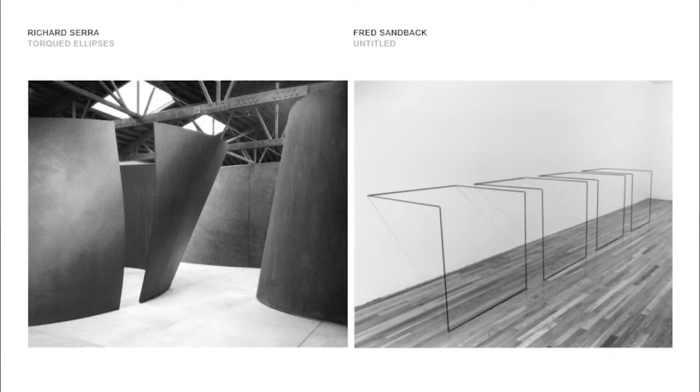A few years before starting the competition for the cathedral, I happened to be in New York at the Dia Foundation on 22nd Street and saw the first installation of Richard Serra's torqued ellipse. These massive pieces of Corten steel are shaped to form spatial conditions. To experience one in person is a profound experience.

At the same time, across the street at the Dia Foundation, was an exhibition of Fred Sandback, who also makes space but with the most minimal, ephemeral means—small cords, actually pieces of wire, stretched between rooms to transform space. That contrast of weight, lightness, and space was really profound, and something to think about when considering a cathedral.

As a young architect, travel is extremely important. Take every advantage you can of the opportunity to travel.

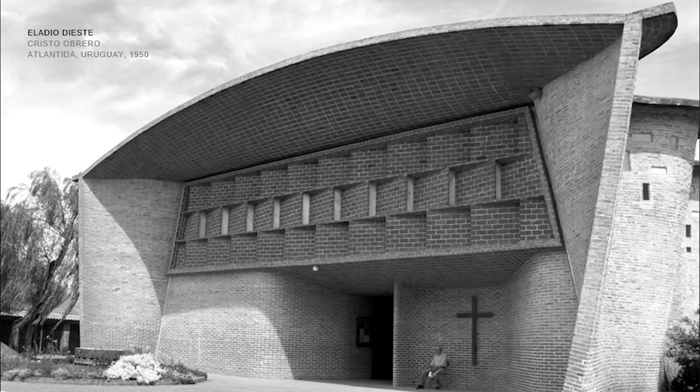A few years ago, Anna DeBrea, a professor here at school, asked me to go to Buenos Aires to teach, and we took the opportunity to go to Uruguay to see the work of Eladio Dieste, who worked with farmers and construction workers to make these incredible spaces.

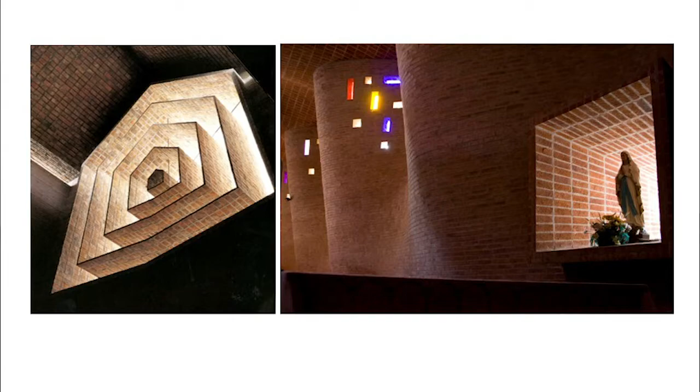This is a church made entirely of brick, where the curved forms you see create structural strength and resist lateral forces. Again, light really ennobles this most modest of materials—brick—to make this beautiful space.

So light is really a transformative material to work with. This is the Air Force Academy chapel in Colorado Springs, designed by the architect whom I first went to work for at SOM, who was a partner in their Chicago office.

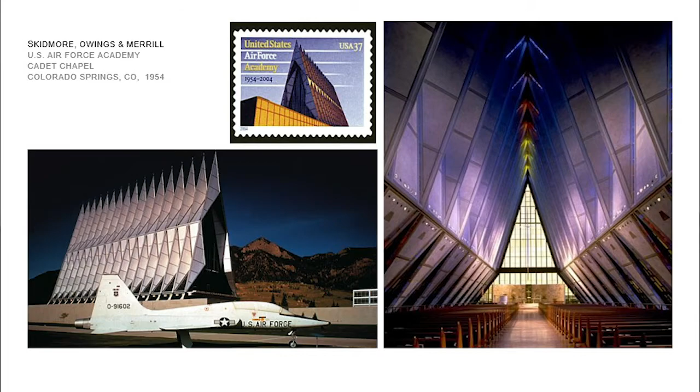He taught here for a couple of seminars over time, and through that I was invited to join them, which I found to be an extraordinary experience. In my entire career now, I plan to be there for 2 years.

But this is the interior of it. You can again see how light and the use of small amounts of stained glass transform aluminum.

So you are in a moment in planetary history in which we as human beings are shaping what the planet is and its very viability for human life. So as architects, planners, city planners, you have enormous power to affect the natural environment.

Almost two-thirds of the carbon dioxide that's emitted comes from our buildings that we produce, how we move between them, and how we operate them.

So as architects, designers, and planners, you have enormous opportunity and really responsibility to think about how we can deal with the fact that we have fewer natural resources on Earth, less biomass support than we have, and more people than we have to be supported by that.

So for sure, we've seen even in the last decade that there are ideas in city planning, in architectural design, in transportation, in technology to radically reduce our consumption.

Reduction of consumption at all levels is important, and that even means being careful about what you build. Always try to be efficient in the way you use material, the way you run your life, in conserving water, energy, and consumption in general.

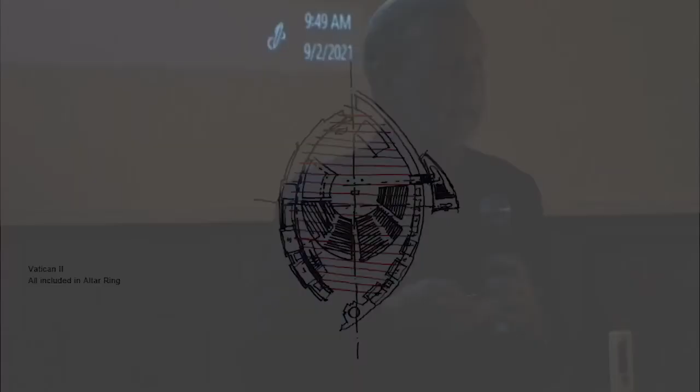And about form that might be soft in this case, that might be fluid, and especially respond to the commodity part of Vitruvius's triad, which is the function of the Catholic Church.

I'm not Catholic myself, so I relied upon research with Catholic scholars to make sure what I was proposing wasn't crazy, and found that in 1962 there was a reformation of the overall orthodoxy of the Church, including how churches and cathedrals should be organized.

As opposed to a linear basilica form cathedral—the great cathedrals of Europe, if you've seen them, the Roman cathedrals are all long and thin—that's based on an early Roman basilica form, which was a kind of marketplace.

The idea about that linearity was that the priest, or bishop, was at the front, so your relationship was you, the bishop, and the bishop to God. That was kind of the hierarchy.

So the Reformation idea was to create a community of people about the altar, so you were as one, as a community.

So this presented some interesting possibilities and also some real challenges, because the great basilica form cathedrals, the ones we really know and admire, have iconic shapes.

This sort of fluid, bulbous form instantly was a question to me about how do we resolve this to achieve the third point, which is beauty and delight.

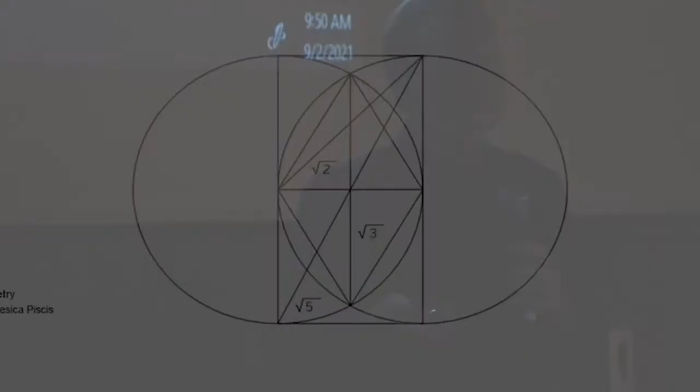So that was a study, knowing that all of our work should be informed by geometry. The early cathedrals, of course, are geometry—if you look at the plans, they are really rigorous geometries in plan, and even taken to the third level in three dimensions.

So for this particular plan, I noticed that if we took two circles and made them intersect, we could create that shape you just saw in sketch form, with the two intersecting pieces of that circle beginning to form that shape.

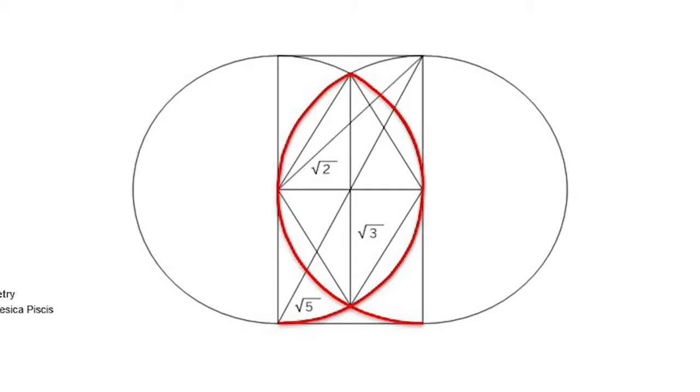It didn't take long to go beyond that to see the reference to the fish, from the early Christian symbol of drawing a stick in the sand—one believer would make a circle this way, and the person they met on the beach, because this was a dangerous time to be a Christian, would make a circle the other way to form the Pisces symbol, signifying a common belief.

So anyway, it's sort of coincidental or interesting that this form has now been observed by the Hubble telescope and other distant galaxy observation techniques, seeing star nebulae that form the same kind of shape in the universe. That's maybe coincidental, but interesting.

So in architecture, the way we start is always with pencil sketches, or now with digital sketches, and with 3-dimensional models, beginning a rough study of how we get to form. Once you've done that, you want to begin to find ways to create rigor and clarity around that form.

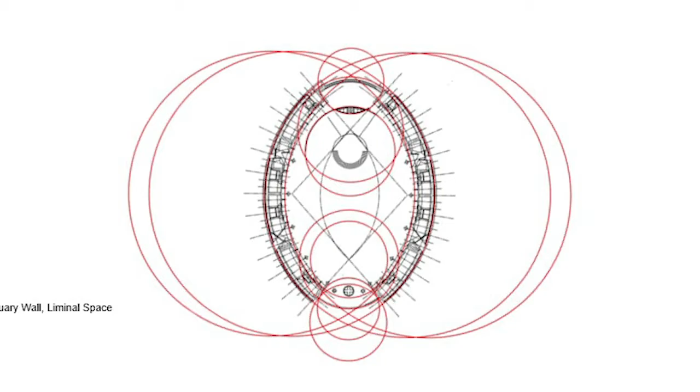So after developing the intersecting circle idea, we took the next step to begin to form what the plan might look like. You see these deeper walls, and the idea that the circle could begin to form a field of repetitive geometry that formed the overall space itself.

Then to take this into the third dimension, like the great Gothic cathedrals, we took the next step of taking that plan geometry, the circle, and making it into a sphere, engaging those spheres just like we did the circle, to create a form that when cut can begin to reveal a spatial idea.

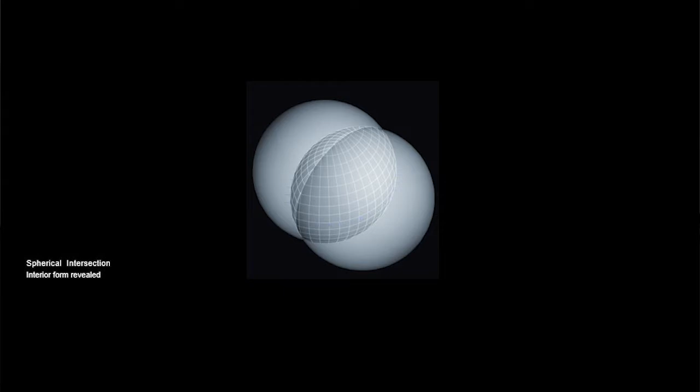This wasn't an automatic thing. We began with sketches and model making to see what kind of form we were to get to, and then applied this geometry to clarify it.

So this became the shape of the building itself on the inside, and I wasn't pleased with that shape as an exterior expression, nor was it easily constructible, because as a compound surface, it bends in two directions in plan and elevation, so that's very expensive to build.

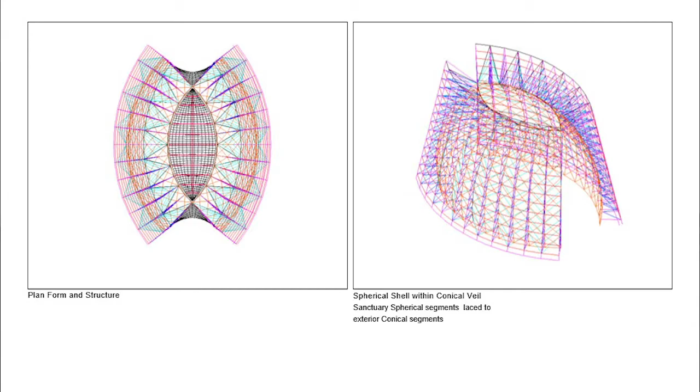But we knew we could make that out of wood. To enclose it, if that were wood, a simple way would be to make two conical segments that can be made of flat plates and stacked up in a way that's really pretty economical to build. So that was the essence of the beginnings of the formal thinking.

The site itself was always the piece generating the thinking about this. It was originally a parking lot next to Lake Merritt, and you can see there was a 16-foot separation between the parking lot and the lower level that was the lake, and the upper level, which was the level of the city. So we had that 16-foot strata.

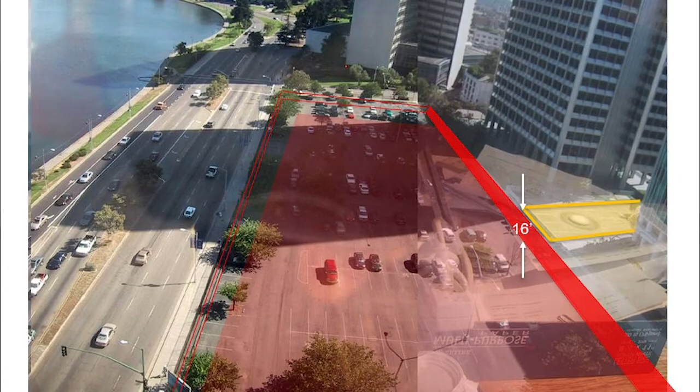We had a very long site, but we had this other strata to think about, and how we bring the city together with this site. That presented some really interesting and great opportunities for us, because in addition to the cathedral, there were a lot of support things that go with it.

The dependencies included conference rooms, bishops' offices, and offices for the diocese, a mausoleum, a parish hall, a conference center, parking, all this stuff, cafe, bookstore, a rectory for living, and the cathedral.

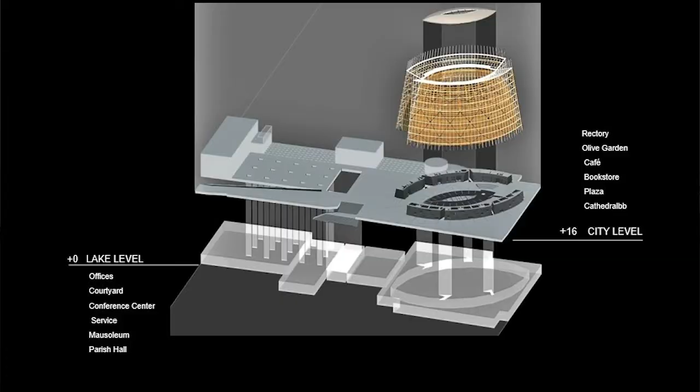So in order to not have the cathedral totally subsumed by all these uses, we were able to take that 16-foot datum and use that as a strata in which to place all the things below, at the lake level and up to the top. This created an opportunity to create an artificial ground plane at the level of the cathedral and let the cathedral be really dominant in the landscape.

And to form this series of spaces you see here, a park—basically an Olive Garden park that's open to the public—a plaza, entry plaza, and make it a really open and dynamic place for the city where people could move through it and around it, and come and stay, and not even necessarily go into the building itself.

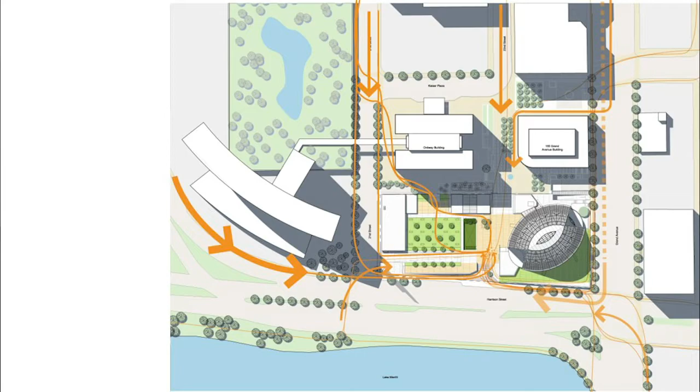With this, there were some really critical issues around how the cathedral was placed on this site. We've turned it, and that's turned very specifically to take it away from the axis of the city and bring it to the axis of nature. There's a pilgrim's pathway, we call it here, which is an orange line that brings you up from the street by a ramp for wheelchairs to get up to this.

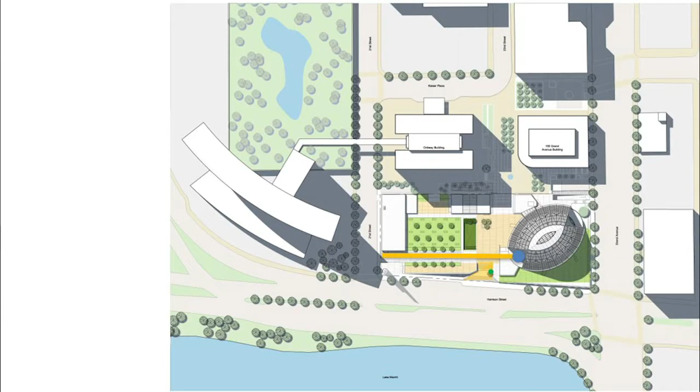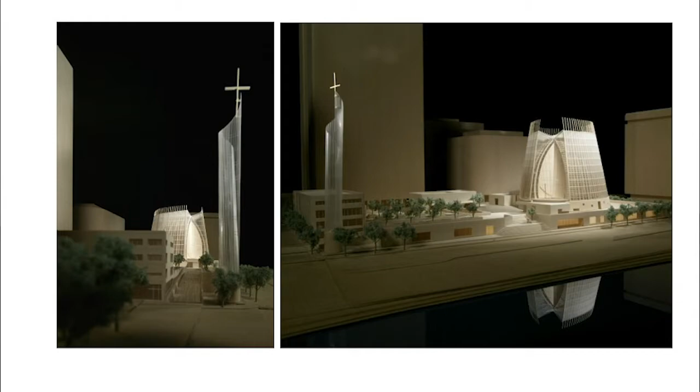You can come directly through from the city to this edge, or by civic stair steps here to the lake level. The axis of nature is at roughly 22 degrees, and that became the axis in which we turned the cathedral to honor that axis and connect directly with the lake. So the cathedral was literally turned away from the city's geometry and made to follow the geometry of the lake.

Early study models show this bell tower of glass, defined by the Fibonacci sequence. We didn't have the budget to build it, so that's a future fundraising opportunity for someone. But you see the cathedral in shape beyond.

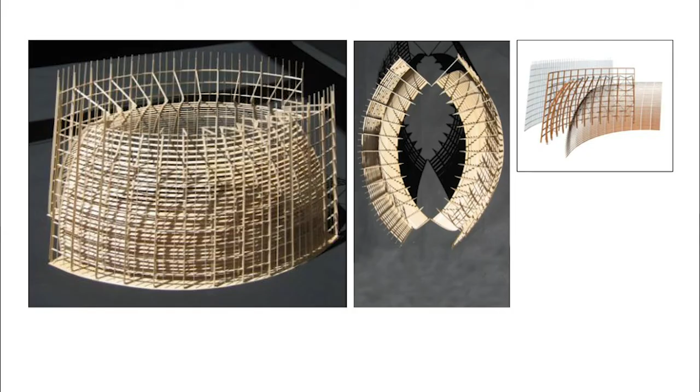The cathedral is made of two layers: the one I first described as spherical segments made of wood, and then the outer layer, made of glass and steel, which is the protective membrane that keeps the water and wind out.

So here are these layers stacked up. You'll do drawings like this at some point in school. It's called an exploded axonometric—a way of looking at how materials and spaces come together.

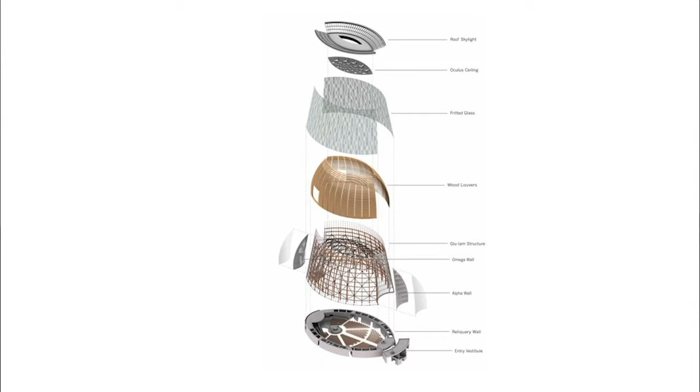You can see the reliquary wall at the base and the seating bowl, the conical segments that surround the center sphere, and then the glass that surrounds that, and the rooftop, which has glass as well. So this very powerful wall at the base, we've dubbed it the reliquary wall.

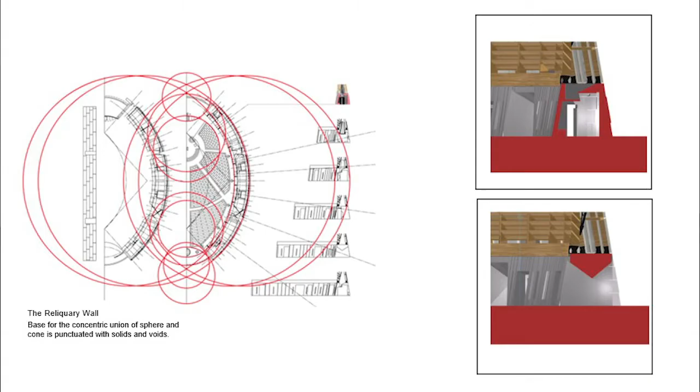Relics were kept in cathedrals in the past. In this case, we've called it a reliquary wall because we've used it to carve out space within that thickened wall—it's 15 feet deep at the base and steps up. Within it, we have chapels, shrines, and openings that connect through to the city.

Here's a view of that plan in detail. You can see the altar in the middle, and the gold lines that go out from it, slicing through that reliquary wall to open up and make connections to the city and to the lake. Then the blue line connects through from the baptismal font, coming through the main altar and the sacristy at the end.

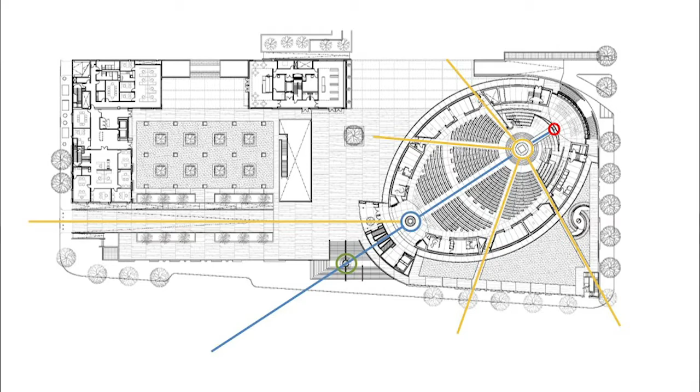Here is an ancient olive tree that we brought from Jerusalem that makes that connection complete. We always study these elements in three-dimensional model form, using everything we can get—cardboard, wood. These are some wood models we use to study this, again looking at, in this case, the altar: a cubic piece of stone, and a circle.

A square and a circle in Asian culture means heaven and earth brought together—a very powerful metaphor. You can see both the main axis here and the ones that cut through the reliquary wall to open it up.

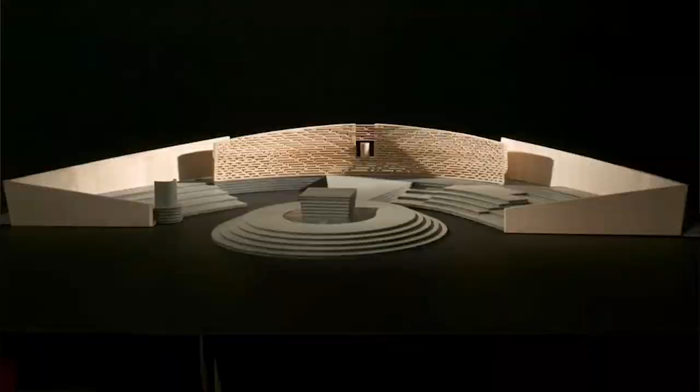Another study for the reredos wall that forms the backside of the altar, again made of an individual piece of wood. You'll see that later.

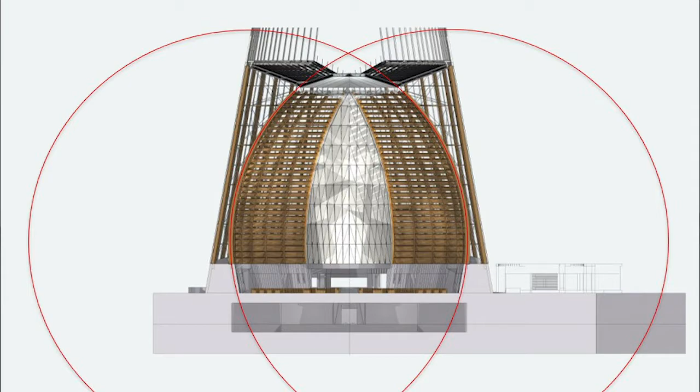Here's a cross section cut laterally through the building. You can see how these two circles, the exact same circles in plan, are used to define the interior of the sanctuary. More importantly is the organization of the mausoleum below the sanctuary, and then these great spherical walls, actually made of heavy timber—we can talk later about the reasons for that—designed to reflect light indirectly into the space. It's topped by an oculus ceiling, a skylight that forms the top of this piece.

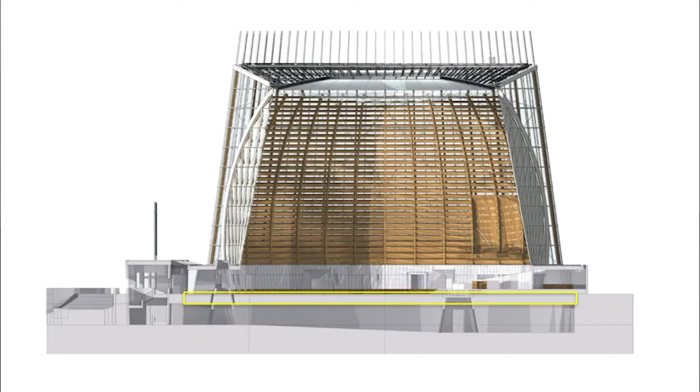Here's a section cut in the other direction. Again you see the mausoleum at the base, and in yellow, the connection between the altar in the sanctuary and the altar called the catafalque in the mausoleum. At the other end, the baptismal font at the top also connects to the entry into the mausoleum. So there's an idea here about the circle of birth, life, death, all brought together in this piece. The circle is a very powerful metaphorical symbol in many religions because it theoretically has no beginning, no end—it suggests infinity.

Here, though, is a really interesting opportunity. In California, we have earthquakes, and the earth moves. That's a big problem for architects and structural engineers. So what we've done here is actually separate the building from the earth.

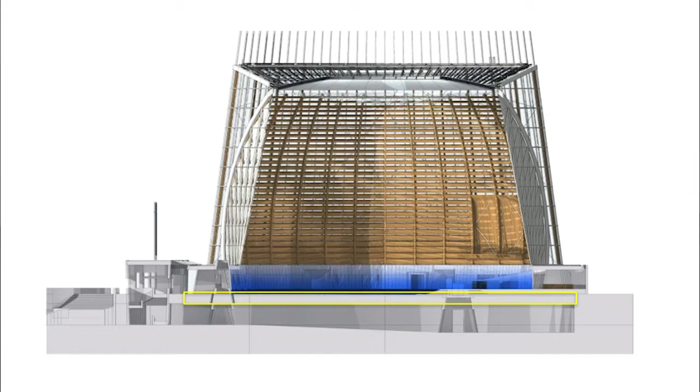This yellow line here is actually a zone in which there are almost like roller skates. There are bowls, round bowls, that have within them a flattened ball bearing. These are big, 5 feet in diameter. So in an earthquake, the earth can move, but the building will very slowly begin to move on those bowls, on those little feet.

Acceleration and velocity are what cause the damage in earthquakes. So this allows the building to be very gently brought back to its original resting place when the earthquake is over. That zone then also allowed us to think about a way of heating and cooling this building.

A building of this height is 100 feet tall on the inside. If you imagine trying to air condition that whole space, it would take the budget of all of Oakland just to supply the energy. So instead, we're only cooling the lower 15 or 12 feet that we occupy.

You see in blue here—this is called displacement cooling. In big spaces you could do it if you wanted to. You introduce air low in the floor, and it comes up through openings. Because cool air is heavier than hot air, it just rests in the area you're occupying, like pools of cool water. This allows us to be very economical with the way we condition the space.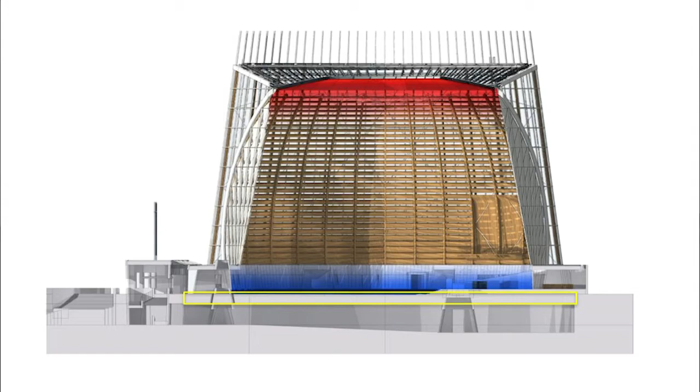At the top of the building, we introduced vents that open when it gets to be over 100 degrees at the very top, where there are no people, of course. This causes natural convection. With the heavy concrete—called thermal inertia—in the evening it's very cool in Oakland, and in the day it gets very hot. The cool air simply gets pulled up by convection into the space. We also have air conditioning available, but we don't have to use it very much.

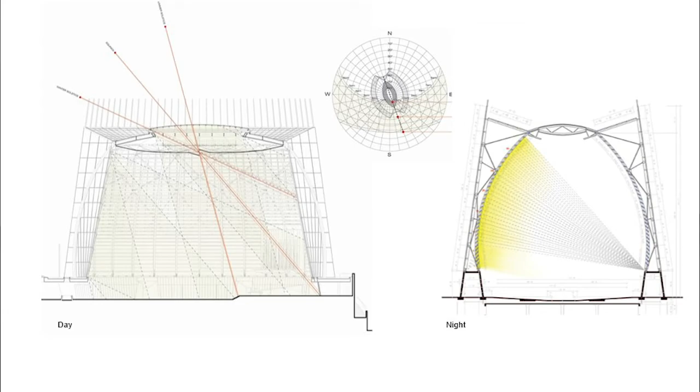So again, it's an idea about working with nature, with the inherent qualities of natural places, climate. Light is so critical—not only daylight, but also the way you light the building in the evening. We've lit the building so that light on one side illuminates this space, and likewise the other side. The effect, when you're in the building, is like light is coming from the altar.

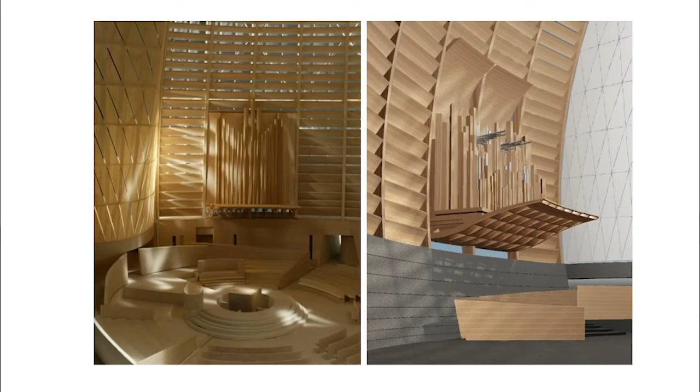We do all kinds of studies, and study models are the most effective way to do this. This is a cardboard model we made, using a laser cutter to cut little holes in it to emulate perforated metal. We studied this in a conference room to look at the nature of light coming through the oculus I mentioned at the top of the building, with the skylight over it.

This was rather expensive. The construction manager who was controlling costs said, Hartman, why would you make a big skylight and cover it up with something like this? I tried to explain, and it was difficult because it was expensive, and it was indeed a skylight being covered up by this veil. But that veil is what really created the poetry of the space, because the way light would strike it, bouncing on its neighbors, made you aware of the presence of light. The bishop happily sided with me and it was rebuilt, because it was really a critical piece of this.

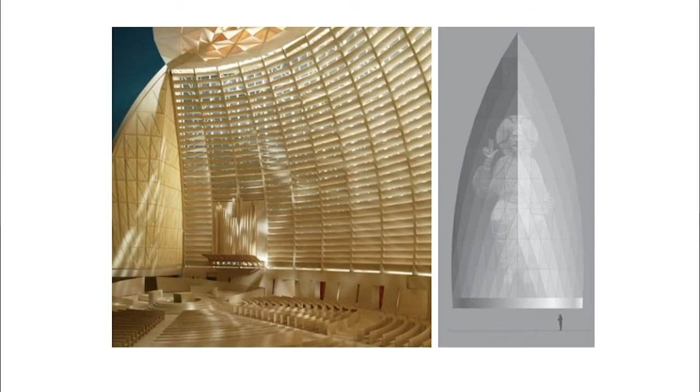The organ in the space uses wooden pipes as opposed to metal pipes, organized in a natural, organic way, as opposed to the symmetrical way you normally see them. So it's like a grove of saplings within this wooden building.

Art is a long story about this—I'll try to simplify it. The bishop again wanted, in this very abstract space which is all about natural light, material, space, form and people, not about stained glass windows, which were a way in medieval, pre-literate days of telling the biblical story.

It was a way of making people understand the gospel. In this case, we're in a literate society, so I didn't want to do stained glass windows. He said, you understand that, but we need to have a traditional form, a representational figure, as he called it. So that's what we see here, a figure of Christ.

And to get there, I asked him, so what does Christ look like? He said, well, go to the west portal of Chartres Cathedral in France, and you'll see this figure, which you see here. And so we used that as the basis of what Christ would look like.

As you know, there are many variations of this idea, this theme, what does Christ look like? Which is one of the reasons we wanted to avoid using an artist, because an artist is always going to interpret images through his or her own cultural lens. We wanted this to be something that you bring your own values to.

So here's the image. In order to do this, we translated the shade and shadow, we mapped it, and then made that into bits and bytes, and created a sequence of about 96 different openings from a quarter of an inch to one and a quarter inches.

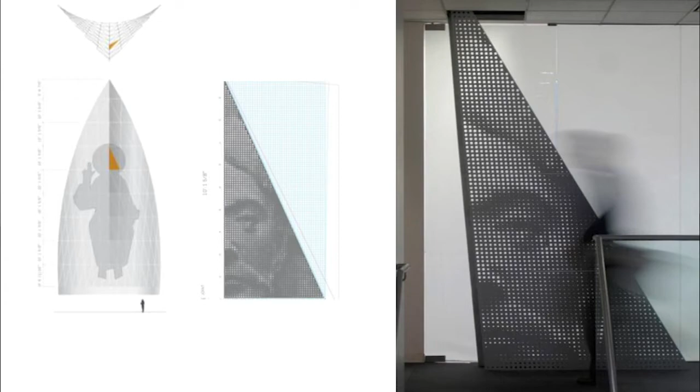So again, mock-ups, we did computational versions. We actually then took a big piece of plastic, used our laser cutter to cut it, as you see here. Put this up, put some tracing paper for our composition glass, lean up against that, and it worked. So we brought the bishop over, and he said, congratulations, you guys figured it out, because the alternatives to this, I gotta tell you, were not good.

There were versions that someone had come up with, a big medallion hanging over the altar with sun rays going off of it. So it seemed like a good outcome overall, but it still seemed like an experiment. We were highly confident it was going to work, but it was an experiment.

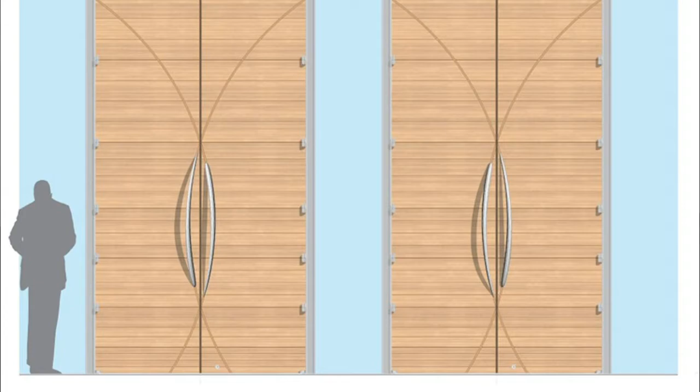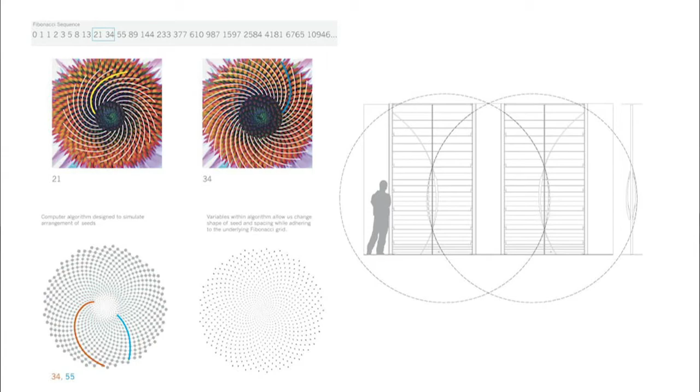We actually used that model, the sunflower seed pod, and we extruded it out using our computers, so the spirals became longer as the door pull got longer. We did many tests, starting with some sketches, and then did these translations. We printed out a three-dimensional physical mock-up of this in plastic, put it on the wall to see what it felt like, and you can see it there.

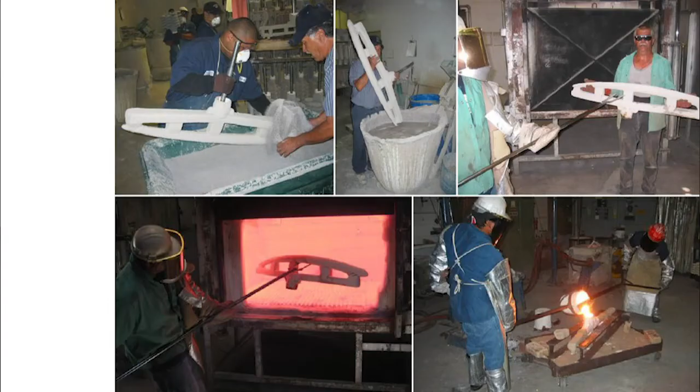Then we sent it to the fabricator, who I thought would simply take a 3D milling device and cut this out of steel. Instead, they made their own version: they took our files, created a three-dimensional print out of styrene, wrapped that in a ceramic mold, cast around it, and then, like an ancient lost wax technique where you melt the wax out of the mold, they melted the styrene, and out of that came this piece of very heavy cast stainless steel.

So that was the piece. It showed up one day before the dedication mass. It was a great thing to have done.

So I'll try to wrap this part up quickly, but you can see that this mock-up, we thought we had to mock it up on the site. This, by the way, was the way the building was built, with this scaffold tower with the ocular ceiling built up there, and the entire building was built up to that. We'll show that in a minute.

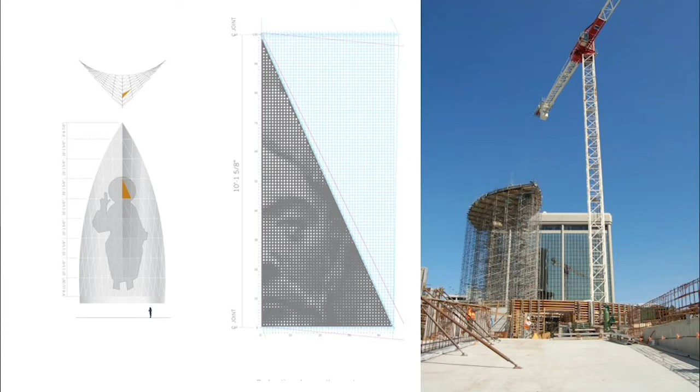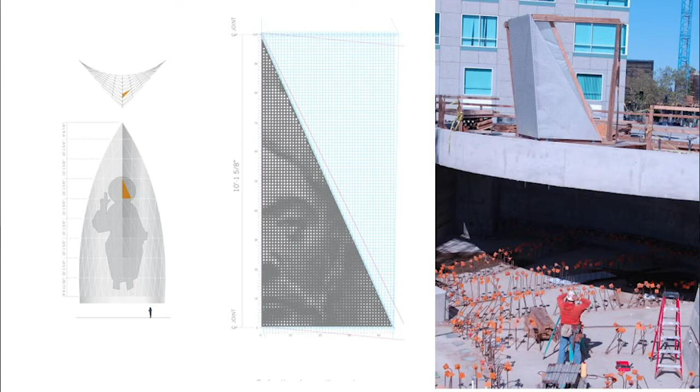The day we went out, this is all about light. You can see on the upper right-hand side the mock-up was placed on a column, and as we walked in, we had the bishop and several other people, 18 or so, and it dawned on me this could be a real problem because there was strong daylight on the face, and this depended on seeing light coming through those pixels, those openings cut through the metal. Without that, it was going to be washed out, which is what you see there. It basically looked like a blob of metal with nothing on it.

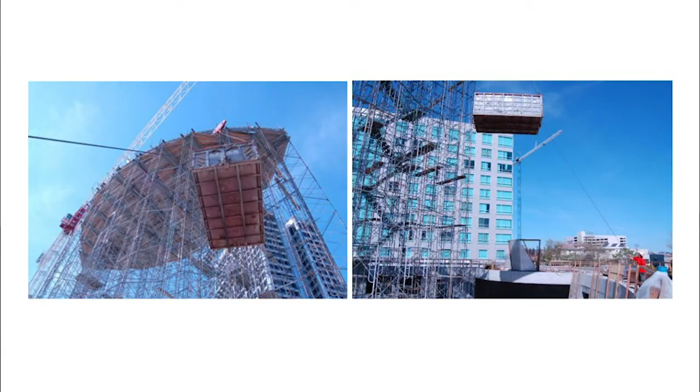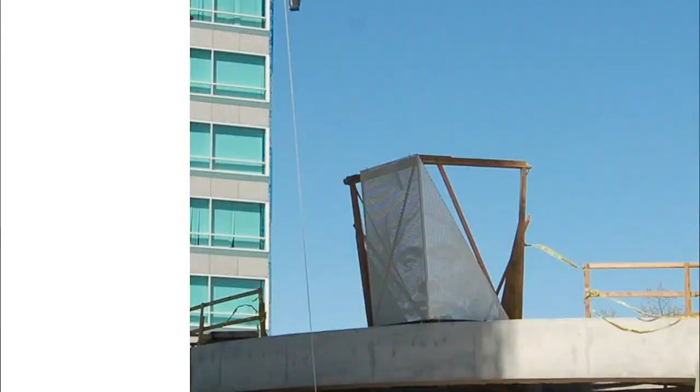My career seemed to be quickly going down the drain, and everyone was sort of scuffing their feet around it. And then the contractor said, that morning looked pretty good. He said it looked really good, and we talked about the light. So they looked around and found this dumpster that was laying on the construction site. They took the tower crane, attached it to the dumpster, lifted it up, and created a temporary eclipse of the sun on that piece. And so Christ kind of leapt out of this piece of metal.

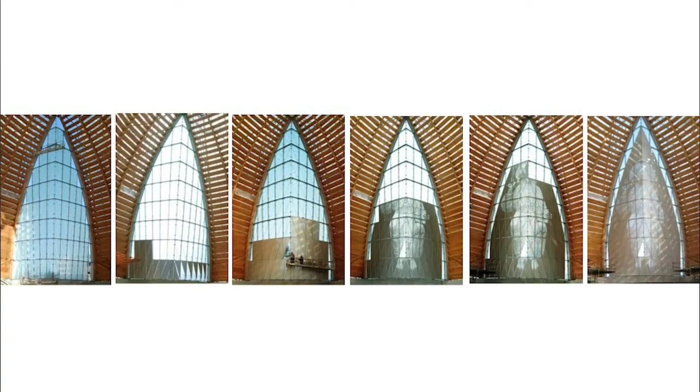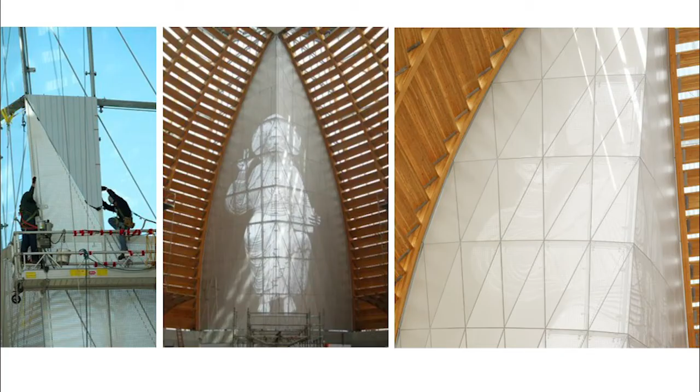You can see it being placed up in place. This was very happy - we saw this finally come to fruition. One of the things I think is so beautiful about it is, metaphorically, it really is taking a 12th century work of art, of sculpture, shade and shadow, and bringing it into the 21st century through light as a veil. So from being this massive piece of stone, it becomes this very ephemeral work of light.

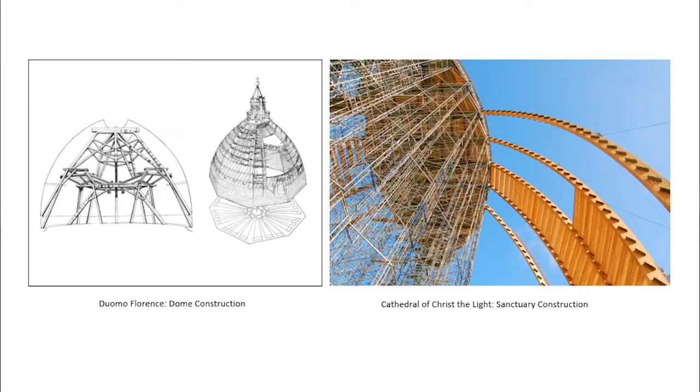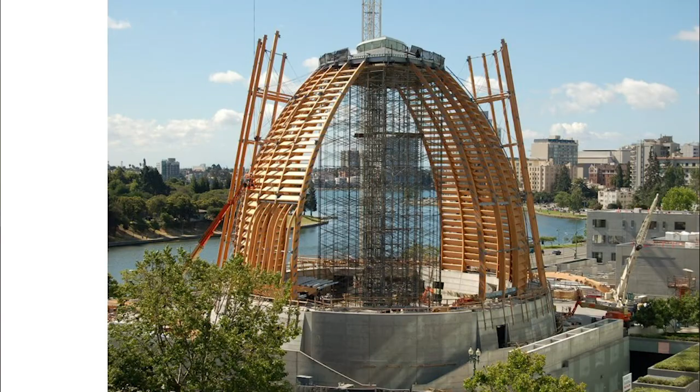Here, it wasn't quite that much invention, but nevertheless it did involve thinking about the construction process as well, erecting these ribs, which were made of wood in Oregon, and brought to the site by truck and then erected in place. And then you can see as the structure starts to go up, again, the spherical forms and the conical forms around it. I was very happy when I saw this.

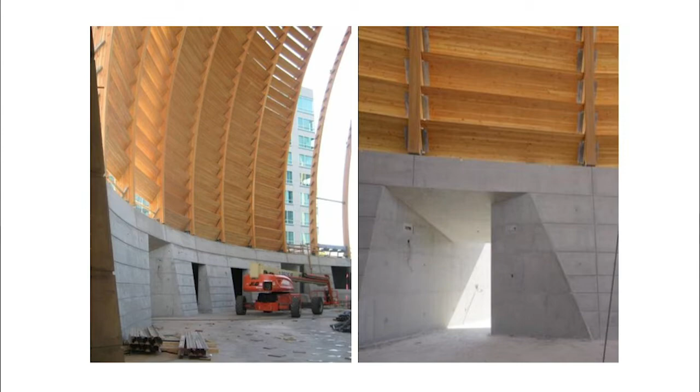This was in construction. You can see the effect of natural light here, the way it was really kind of beautifully reflected into space. This isn't about direct daylight, it's about poetically introducing light into space, and about the way the light penetrated the reliquary wall I mentioned.

So here it was, after a couple of years of concrete and so forth, all of a sudden this wood came up very, very quickly. People were just astounded to see this, and people were very sad to see the glass go up around it, but for me that was really important.

So it's a sort of different way of seeing architecture. And as light moves around the building, it transforms this very luminous structure to be one of, when direct light hits it, becomes one of very much solidity.

This is the inside, so then one of the things that's really, I think, really interesting about the building is that change from that very ephemeral quality of the exterior to this very visceral, of the earth interior, made of wood and concrete.

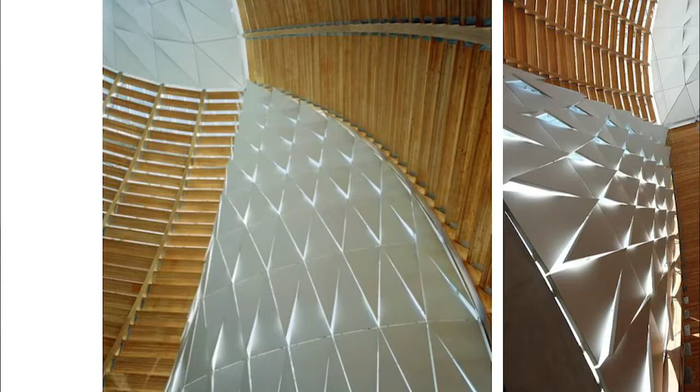Again, the geometry brought together here with a diagrid to resolve the two geometries coming together of these metal pieces that reflect the light in ways that are very interesting as the sun moves across it and brings light into the interior. Here is the oculus ceiling that, again, if it was just a skylight, you've seen these skylights in airports, but when you introduce another device that mediates the sky, the light, and begins to create more poetic ways of introducing light, it becomes much more meaningful, and I think has a much stronger spiritual connotation.

Cut through the piece. Of course, one of the wonderful things about a building like this is its connection with humanity. So when the building was dedicated by Bishop Cummins with sacred oils from the sacristy, he first put this on the altar and then went around during the Mass around the cathedral making the sign of the cross at the stations with oil from the sacristy on the wall. And the beautiful thing is, even 10 years later, you can still barely see those marks, and they slowly become, that touch of that time becomes very slowly embedded and evolves into the architecture.

The reliquary wall I mentioned, again, it's all cut through to connect to the city. It also provides opportunities for very intimate, small side chapels next to this large sanctuary. So within these, there was an opportunity to introduce color, to think about light again, and try to conceal the source of light, but present the evidence of light as it rakes the walls.